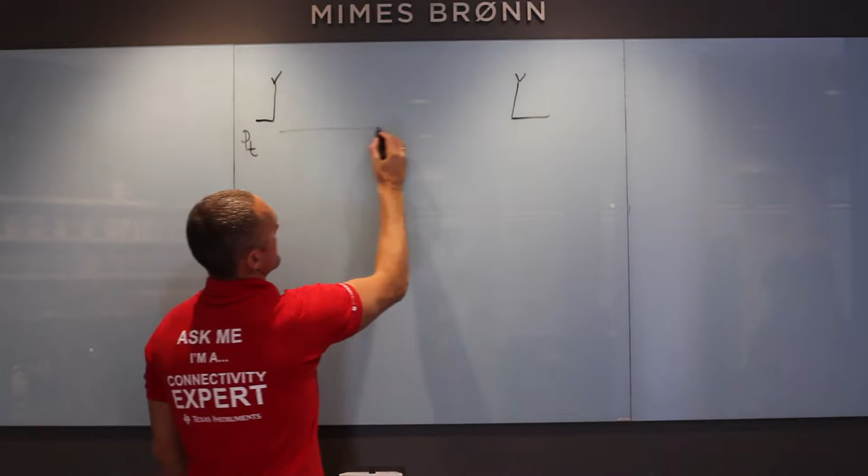Let's assume a simplified system where we have a transmitter and a receiver. The amount of power fed into the antenna is denoted PT. The distance is D, and the amount of energy received is PR.

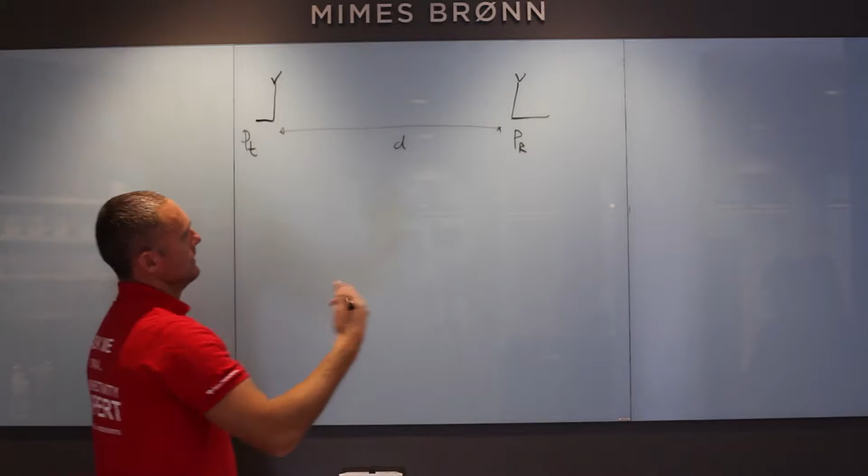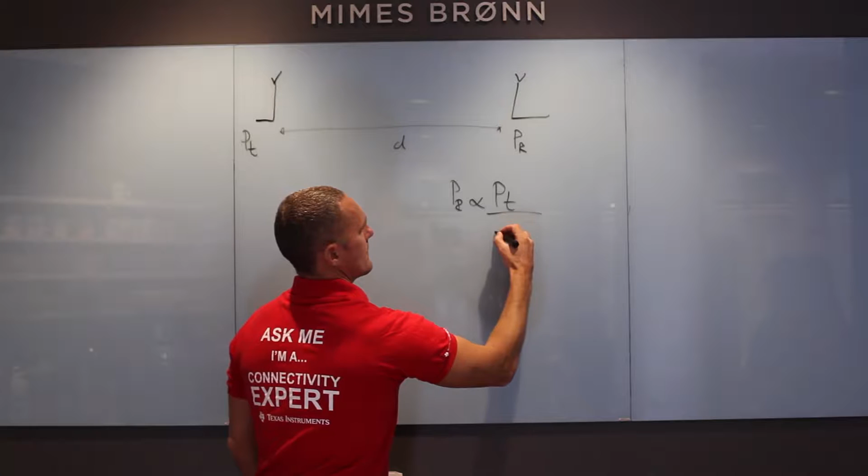Simplified, PR, the received energy, is proportional to the transmitted power divided by the distance squared and the frequency squared. What's important is that the amount of received energy is greater than the chip sensitivity limit for the link to be operational.

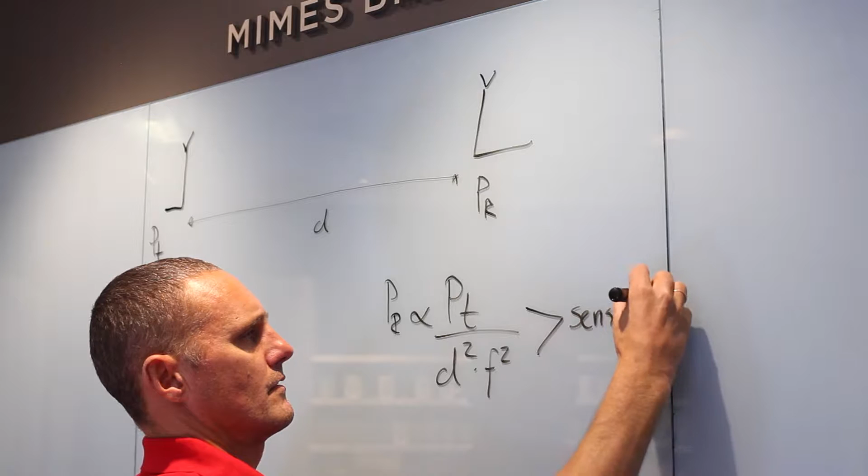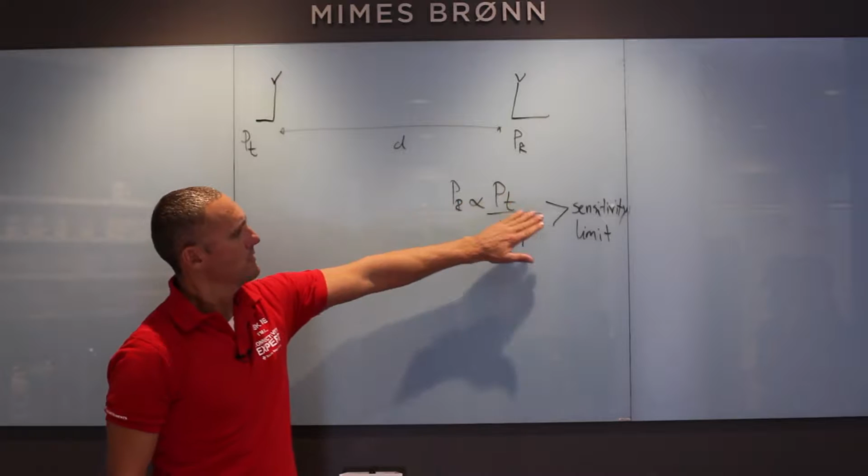From this simplified relationship, we see that by keeping the power constant and the sensitivity constant, you get longer range simply by reducing the operating frequency. So, in the ideal world, these are the only parameters affecting range. In real life, however, there will be obstacles. There will be walls, there will be ceilings, even trees, humans.

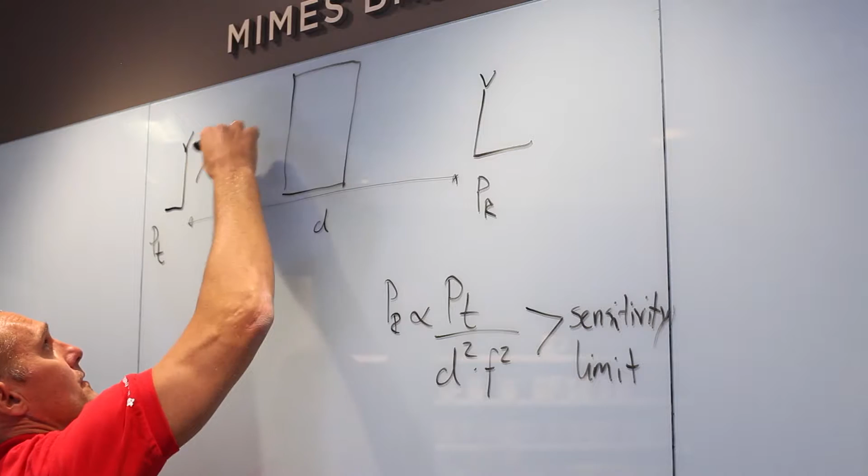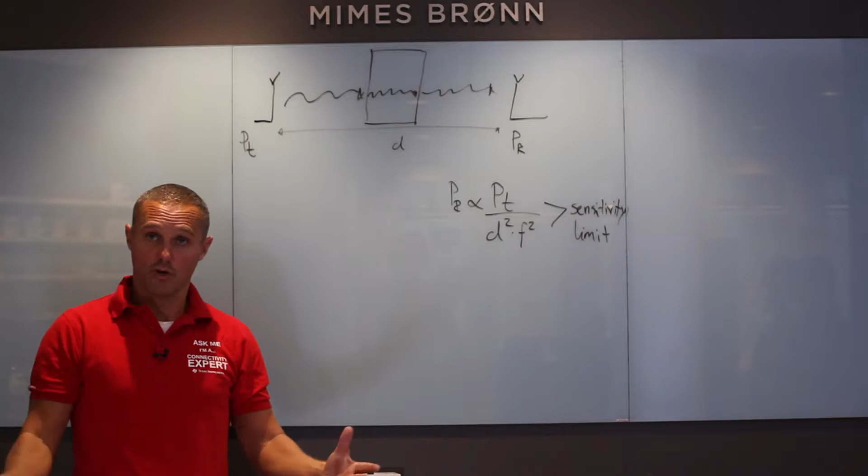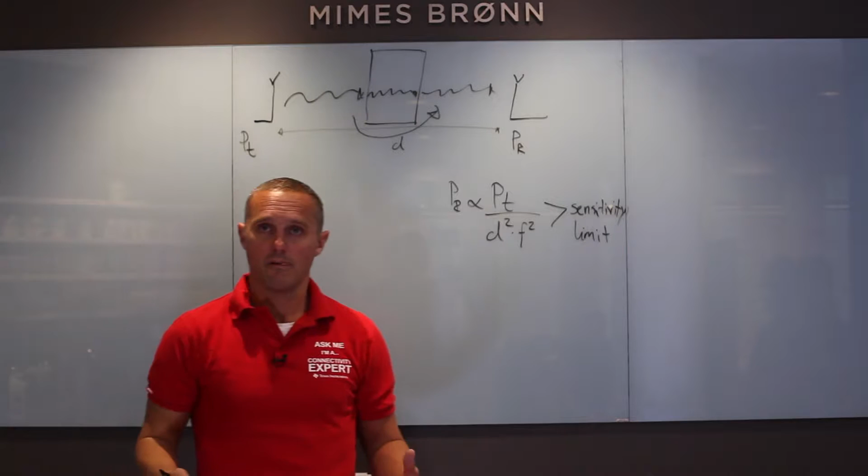So, sub-1 GHz technology has better penetration capabilities than do, for instance, 2.4 GHz. And even more, sub-1 waves are better at turning corners than higher frequencies. Meaning, using lower frequency, you get better indoor coverage.

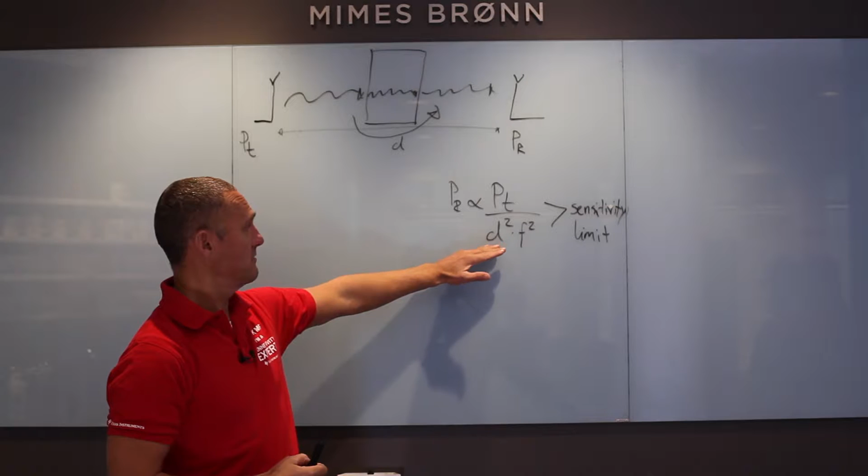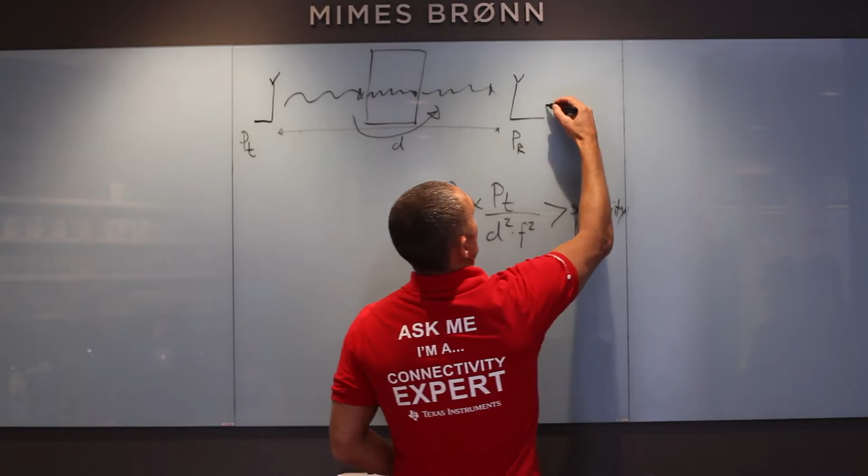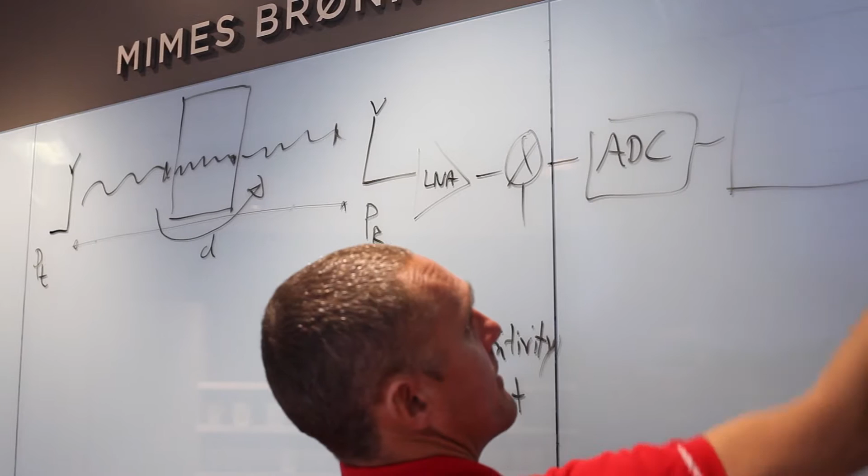So, by looking at this simplified relationship, we see that increasing the distance D is possible by improving the sensitivity, a lower number. So let's have a look at a receiver. What are the building blocks? You have your LNA, you have your mixer, an ADC, and a filter.

The channel filter has a finite bandwidth. It needs to be set according to your data rate, modulation format, and so on. And you also need to take into account any crystal inaccuracies. And the wider your bandwidth, the more noise into your channel, and the worse your sensitivity.

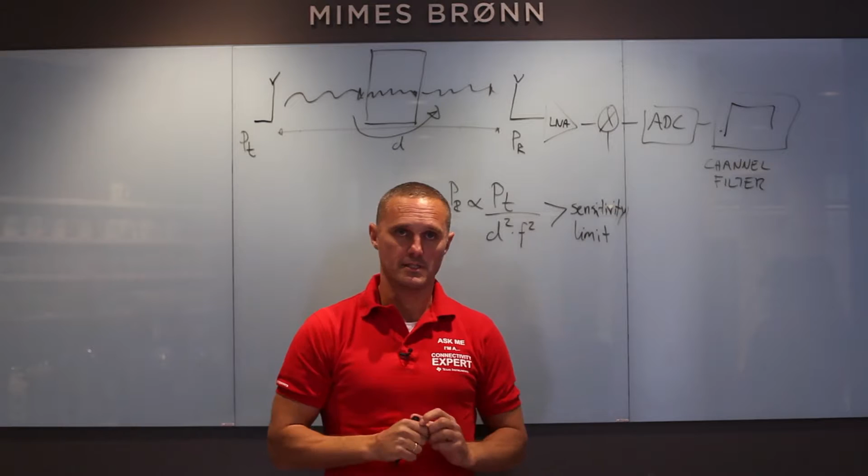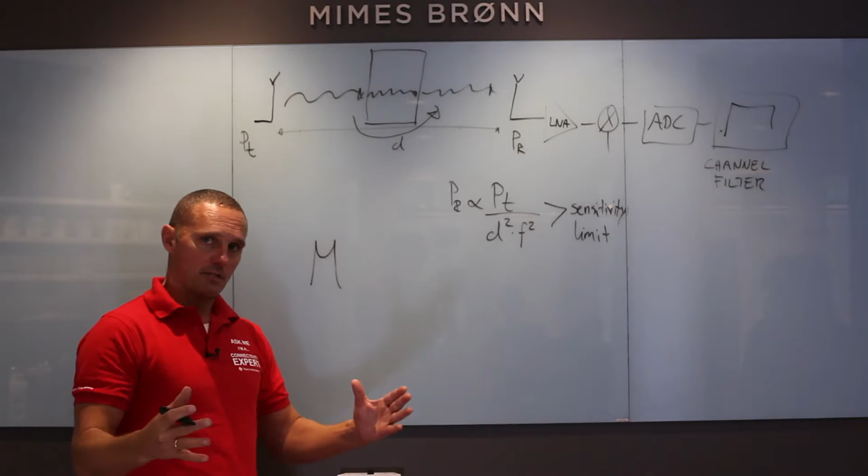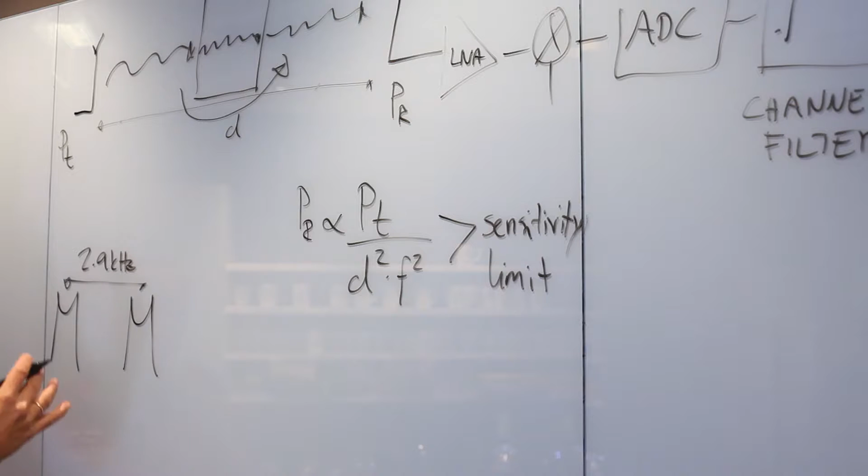So, just giving you a quick example. If you have a 10 ppm crystal and you operate at 900 megahertz, you could potentially get an offset of 9 kilohertz. So, ideally, that will be your transmitted signal. And if there's an offset between the receiver and the transmitter, you could potentially end up at 2 times 9 kilohertz with a 10 ppm crystal, or it could be the other extreme.

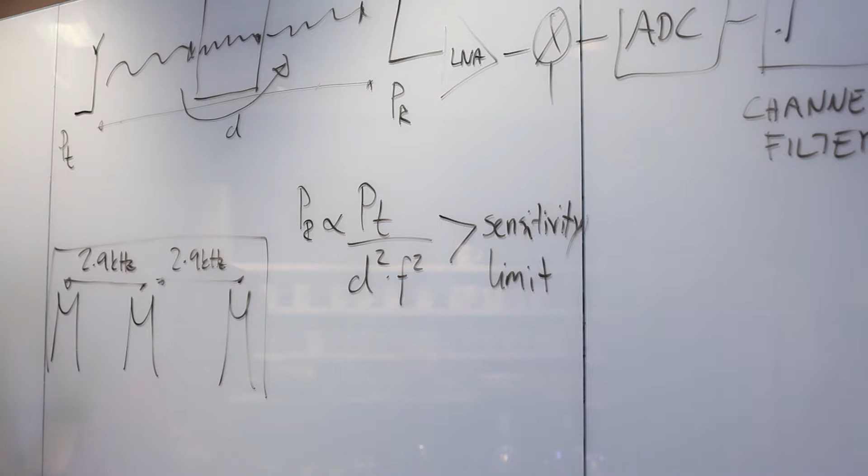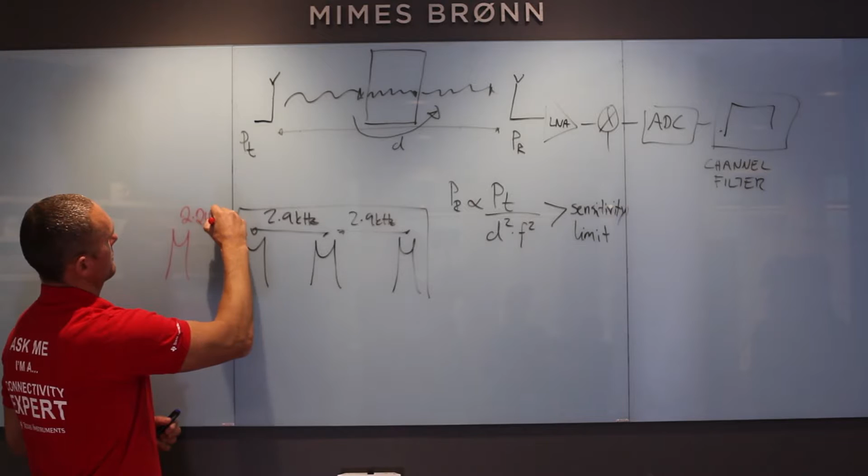So your channel bandwidth needs to be at least as wide as this, okay? That's your signal bandwidth, and that's accounting for any crystal inaccuracies. Now, at 2.4, if you have the same crystal, 10 ppm, instead of these two, you will get your signal up here somewhere, and it's 2 times 24 kilohertz. And it will end up here, and your bandwidth needs to be at least as wide as this. Meaning you pick up more noise and you get degraded sensitivity and hence a shorter range.

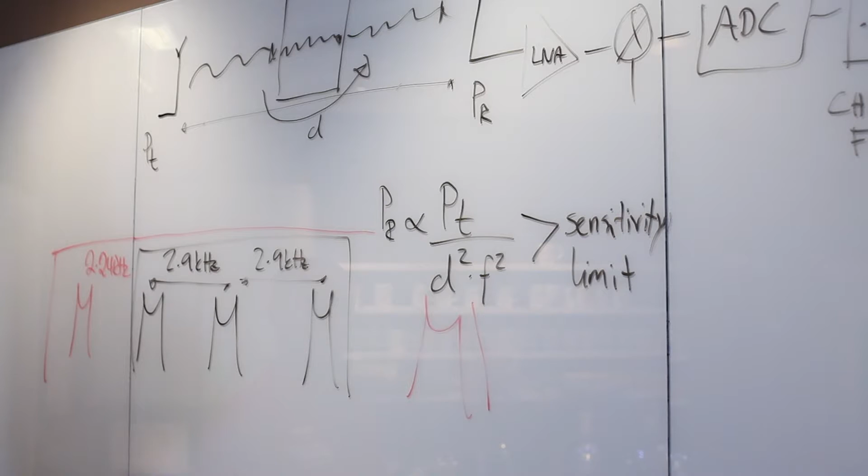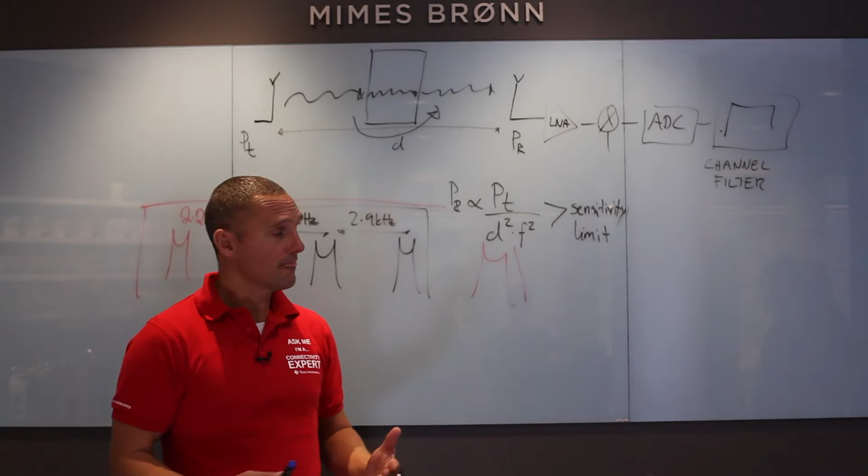Range can also simply be increased by increasing the output power, but in doing so you will also consume a lot more current. So if you increase the operating frequency to 2.4 gigs, say, you will need higher output power, more current, and hence not a good fit for a battery-operated application.

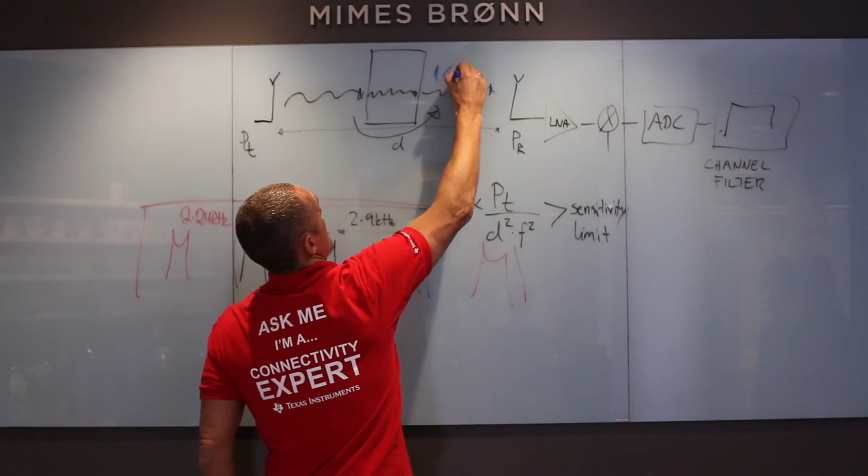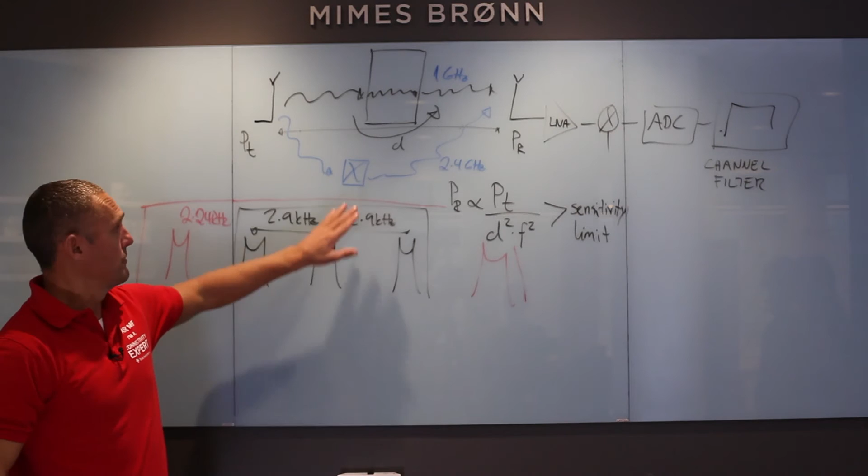Alternatively, if you want the same coverage at 2.4 as you do at sub 1 gig, so that's your sub 1 gig link, you could potentially add an intermediate node which forwards information to the final destination. So that will do 2.4 gigahertz. Now, by introducing this additional node, you will increase the complexity as well as the system cost.

And finally, we have coexistence. At 2.4 gigahertz, there are a lot of devices using different technologies such as Wi-Fi, Bluetooth, and BLE. The sub 1 gigahertz space is less crowded, and the likelihood of collisions is smaller, and there will be fewer retries in your application and hence reduced current consumption.

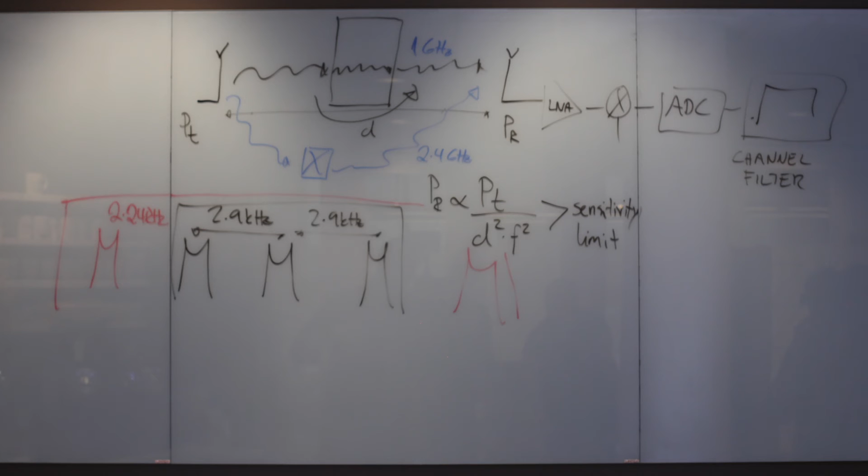To summarize, sub 1 gigahertz operation will give you longer range, reduced current consumption, potentially reduced cost, as well as better coexistence.